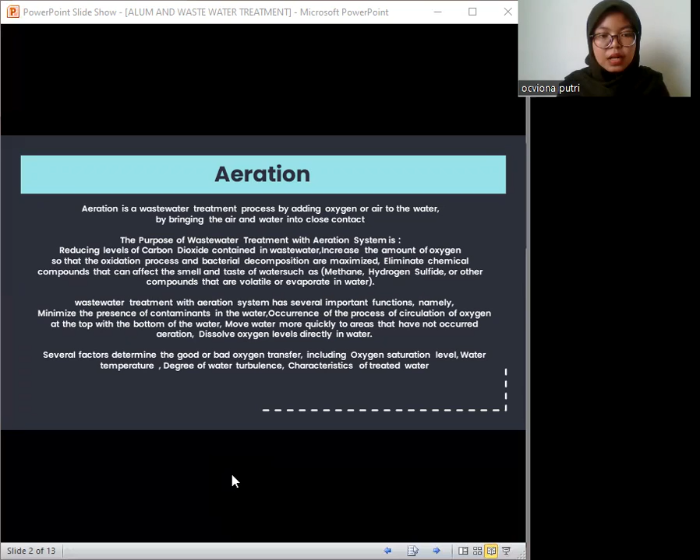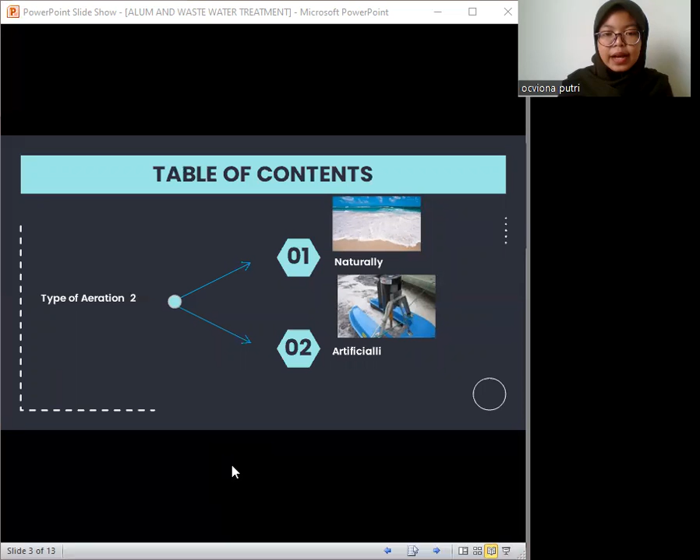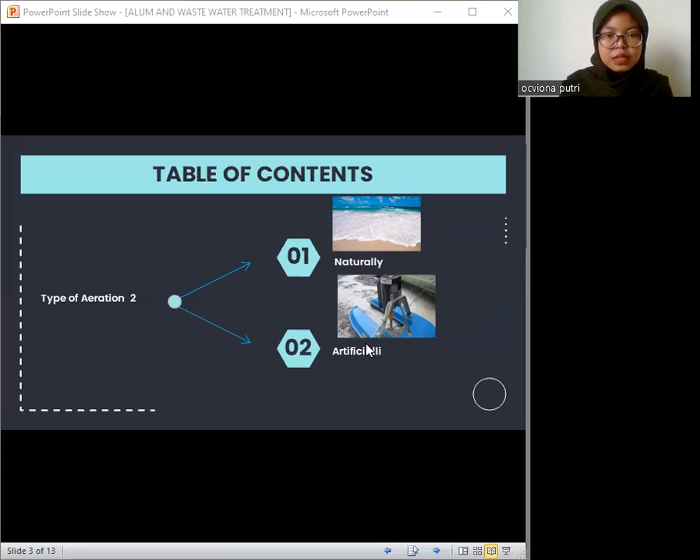Several factors determine good or bad oxygen transfer in wastewater treatment, including oxygen saturation, water temperature, degree of water turbulence, and characteristics of the treated water. And then wastewater treatment by aeration is divided into two types: number one is natural and number two is artificial. This is the example for number one and this is for number two.

So next, natural aeration. Water foam on ocean waves is an example of a natural form of aeration. When the waves hit the beach sand, it has something to do with the seawater aeration system. The white and smooth beach sand is due to the sea water, which contains ionic salts such as sodium chloride, magnesium chloride, potassium, natrium, kalium, etc.

So, when ions in the sea meet with the air and oxygen, an aeration system will occur. And this phenomenon is very beneficial to the biota in the sea, so they can live with the oxygen from the air.

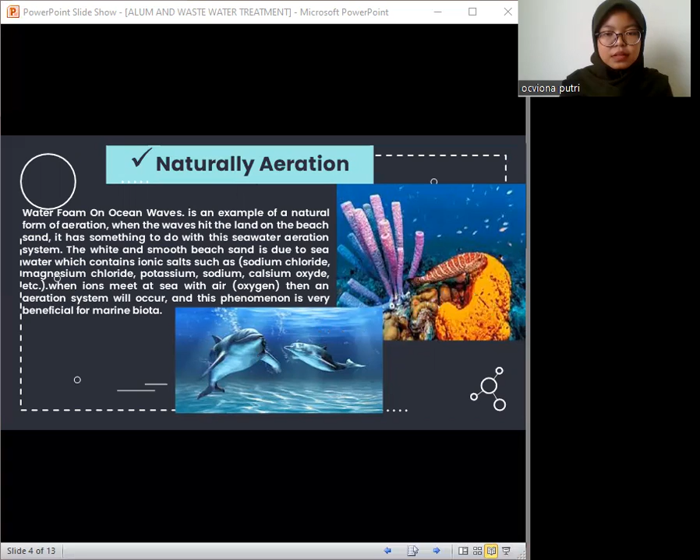Okay, and number two, artificial: the wastewater treatment process using the artificial aeration method. In general, to aerate wastewater, a device called an aerator is used. This is the picture of the aerator. During the aeration process, oxygen will be supplied by the aerator in a certain amount to meet the need of aerobic bacteria that function to decompose wastewater to make it safe for the environment. The addition of oxygen helps microorganisms decompose organic substances better.

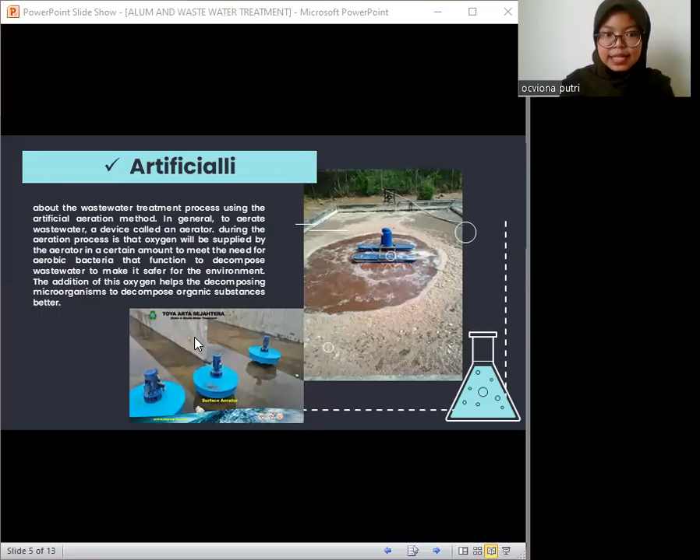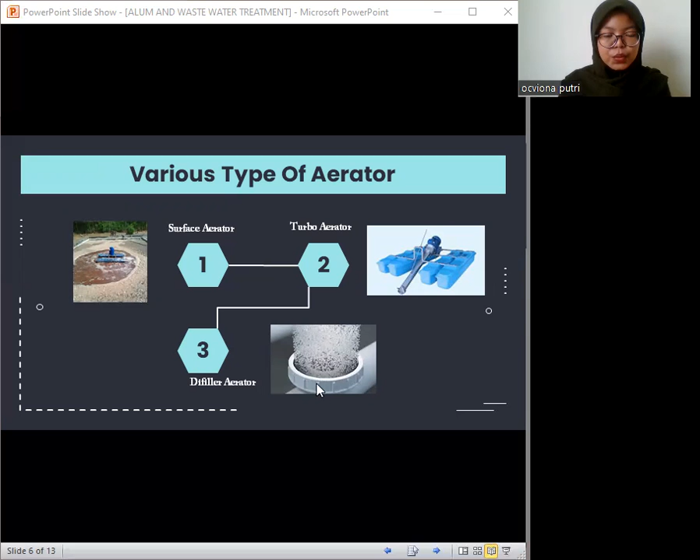And this phenomenon also occurs in clamshells. The longer they are in the sea, the harder they will be. Okay, this is part two: wastewater treatment using aluminum sulfate, with the chemical formula Al2(SO4)3. Processing using the chemical aluminum sulfate Al2(SO4)3, commonly called alum, and Fe2(SO4)3. Alum works as a coagulant that attracts pollutants and impurities in the water.

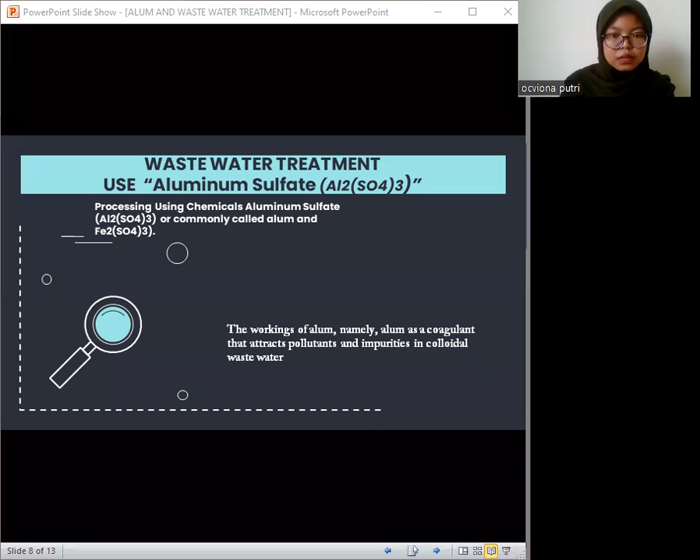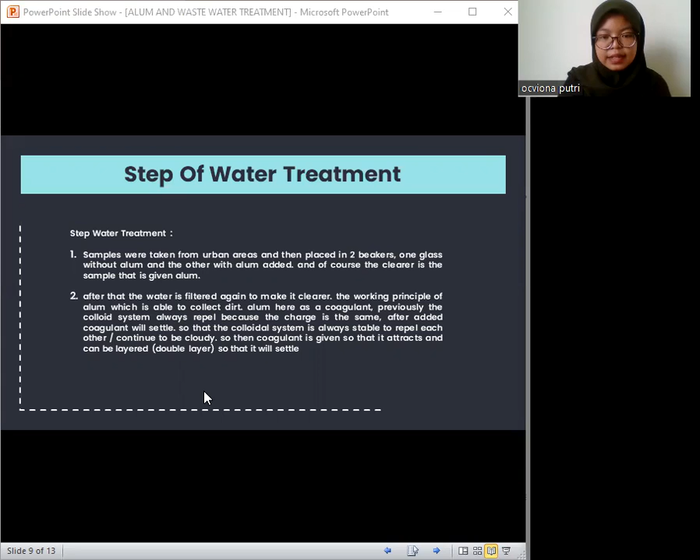The wastewater treatment divides into two types. The first type is water to be discharged into the environment, shown in this picture. I have a mistake in taking the picture - this is water from our consumption for life, showing how we use water to live, and it's important to reduce it or make a new version.

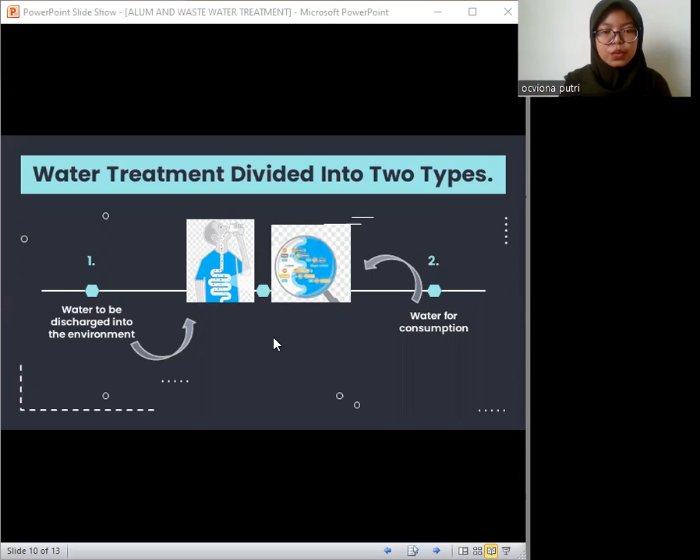Step two is water treatment, consisting of four steps: the first is screening and coagulation flocculation, then clarification and sedimentation, and the last part is filtration. The first step is screening, when the water is filtered or sorted to separate the form of wastewater to be processed.

After that, aluminum sulfate is given, assisted by stirring, so the interaction increases and it becomes easy to settle. Aluminum sulfate, Al2(SO4)3, is used for wastewater treatment. In the coagulation or flocculation part, aluminum sulfate plays an important role - it makes the interaction increase the quality so it's easy to settle at the bottom of the beaker.

The next step is clarification or sedimentation. Here is the settling column for collecting silt - they move very slowly to be deposited.

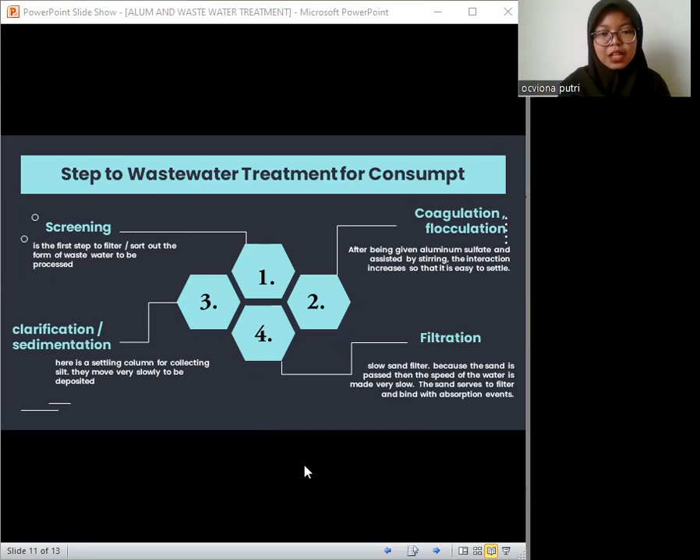Again, this is the video about wastewater treatment with coagulation and flocculation. The material used is aluminum sulfate, Al2(SO4)3. This material is generally used for industrial applications or anything else to filter wastewater. Okay guys, let's see together how about this video.

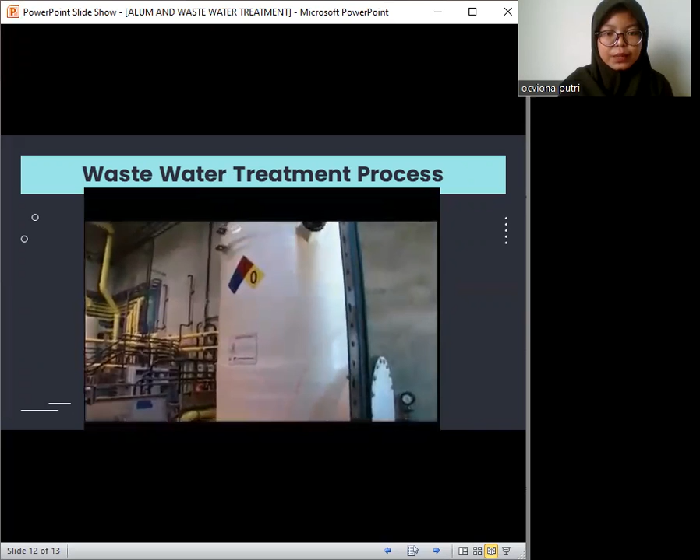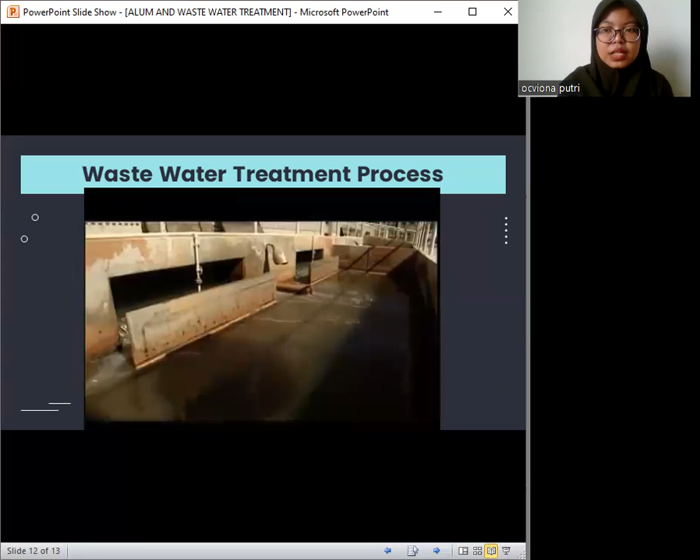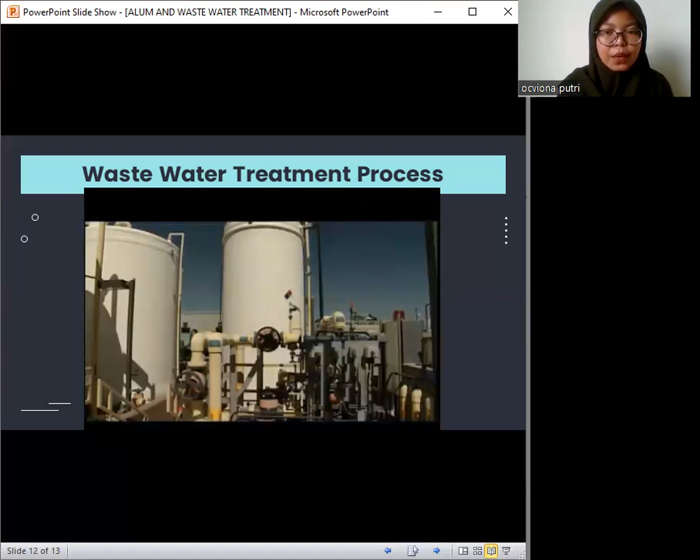In most cases, the chemical reaction occurs in a fraction of a second, so it's important that the coagulant is dispersed quickly and evenly, to encourage as many particle collisions as possible.

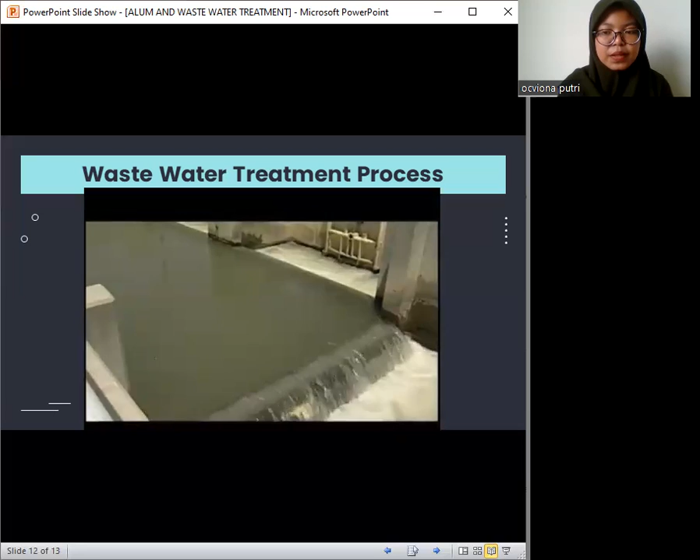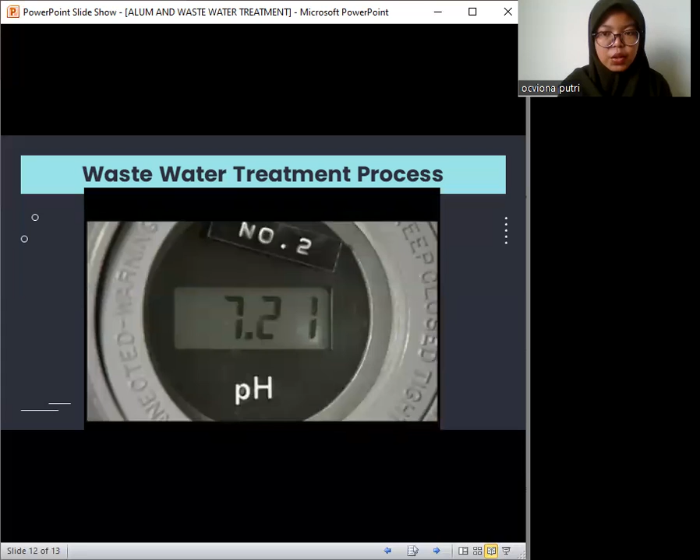Because this process relies on chemical reactions, several considerations must be met: water temperature, for example - colder water usually slows coagulation and flocculation reactions, which may require more time to achieve optimal formation.

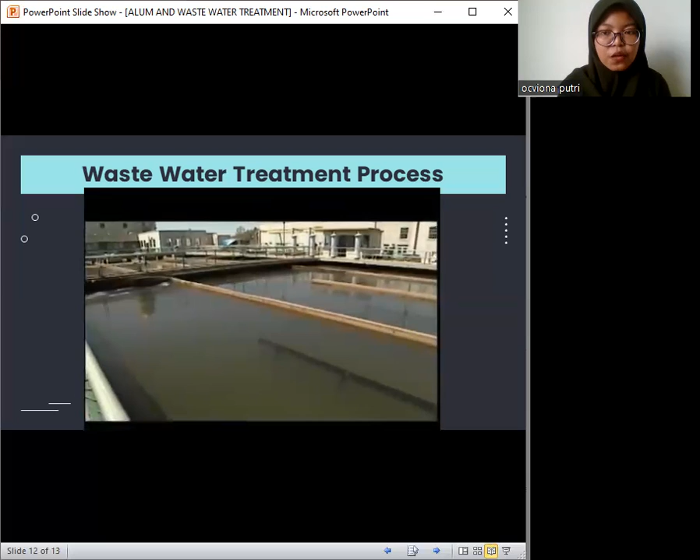Extreme values of pH, high or low, will also interfere with the process. Coagulant effectiveness is highly dependent on pH. For some coagulants, alkalinity is a factor. Operators may need to raise alkalinity for a coagulant to be effective when using iron or aluminum coagulants, which can consume alkalinity and depress pH.

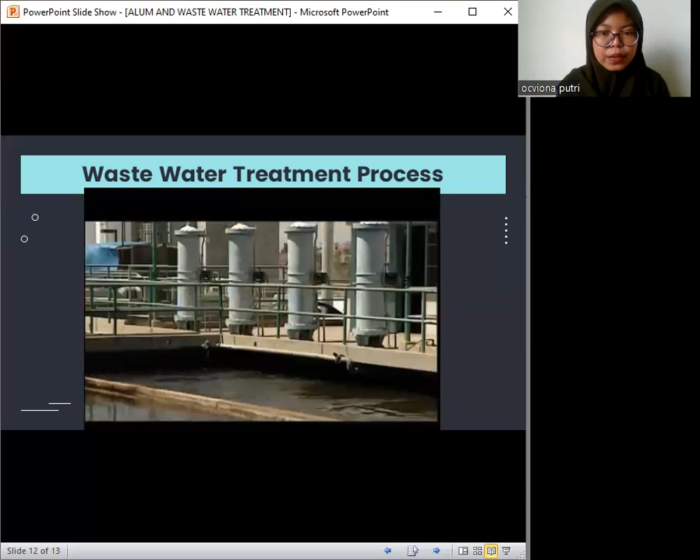When they are added to low alkalinity waters, turbidity is also important - the lower the turbidity, the more difficult it is. From the coagulant family, the most common coagulant chemical used is aluminum sulfate, commonly called alum.

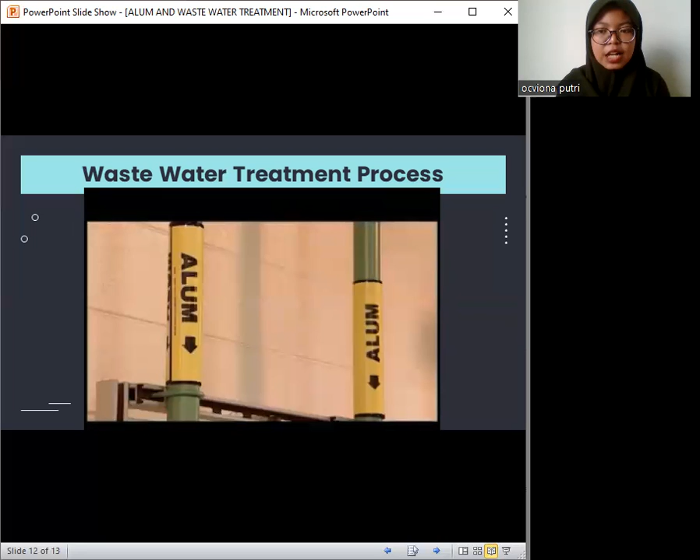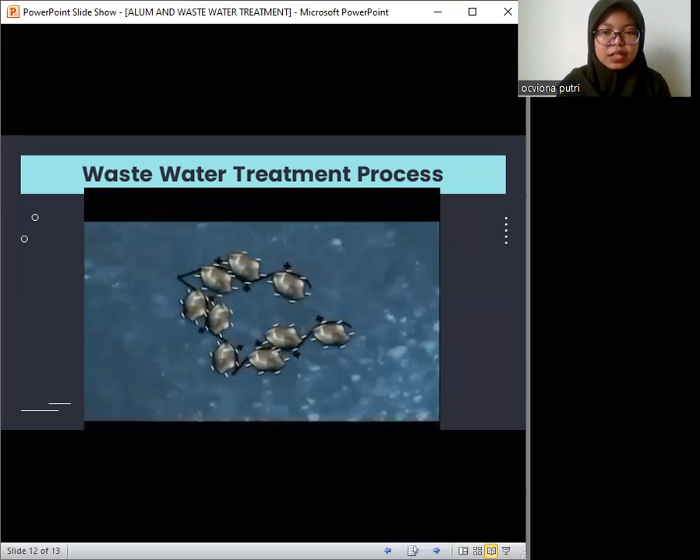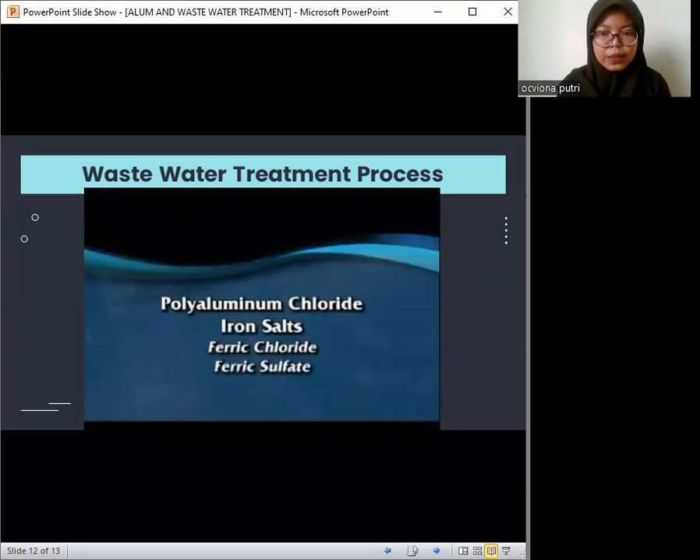When added to water, alum forms jelly-like particles of aluminum hydroxide. The trivalent aluminum ions neutralize and attach to negatively charged particles in water, forming microfloc. Aluminum works best in a pH range of 5.5 to 7.5.

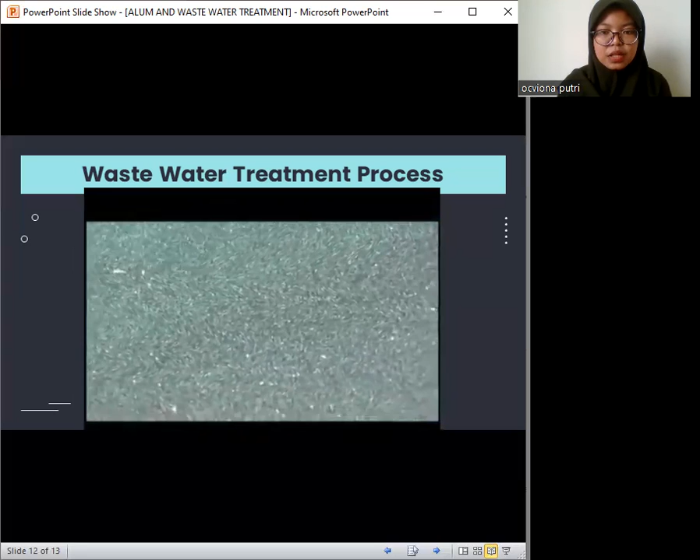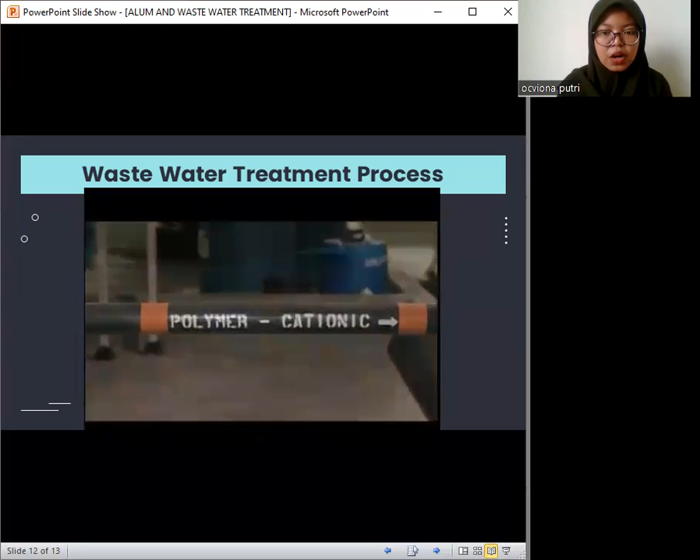Polyaluminum chloride and iron salts such as ferric chloride and ferric sulfate are also used. They operate over a wider pH range. Polymers, as coagulants and flocculants, are added to improve binding, creating stronger and more settleable floc, by increasing floc size, strength, and/or density. In addition, they help overcome the effects of low temperatures, reduce the amount of coagulant needed, and reduce the amount of sludge produced.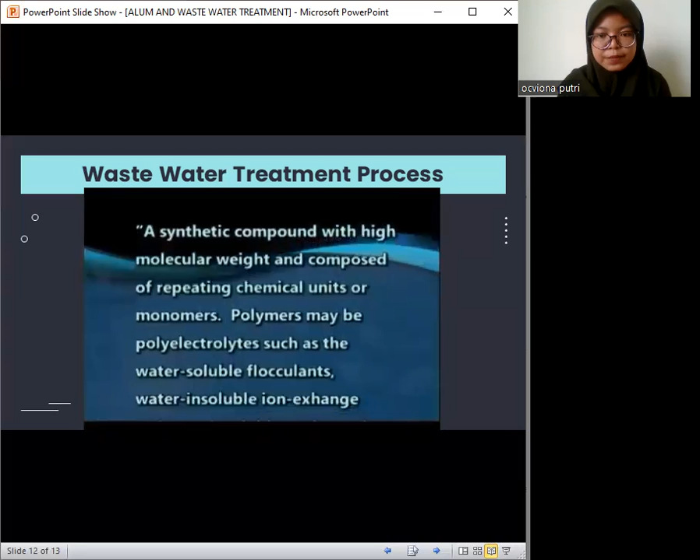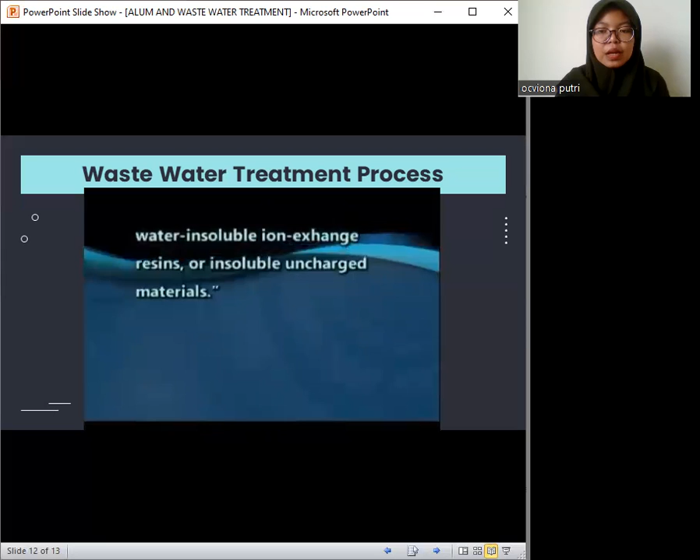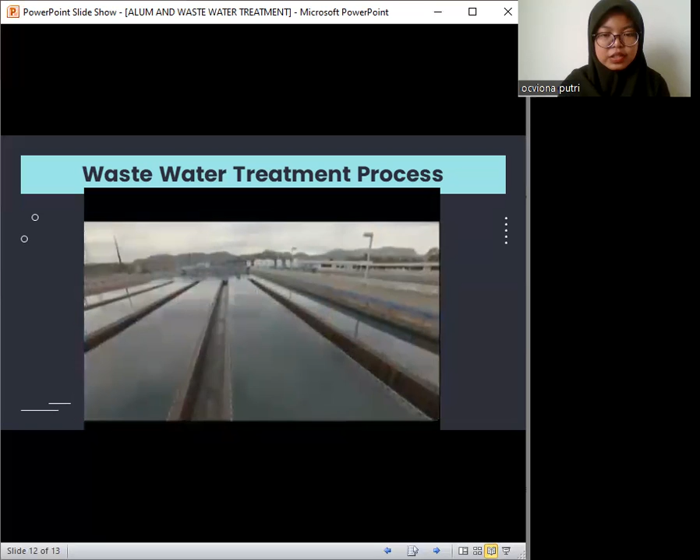Commonly used coagulant polymers may be polyelectrolytes, such as water-soluble flocculants, water-insoluble ion exchange resins, and uncharged materials. Polymers are long chains of molecules that produce highly charged ions and help bond microfloc together into larger floc particles. They are very popular with operators because they are very effective and can be positive, negative, or neutral in charge, providing a great deal of flexibility in different circumstances.